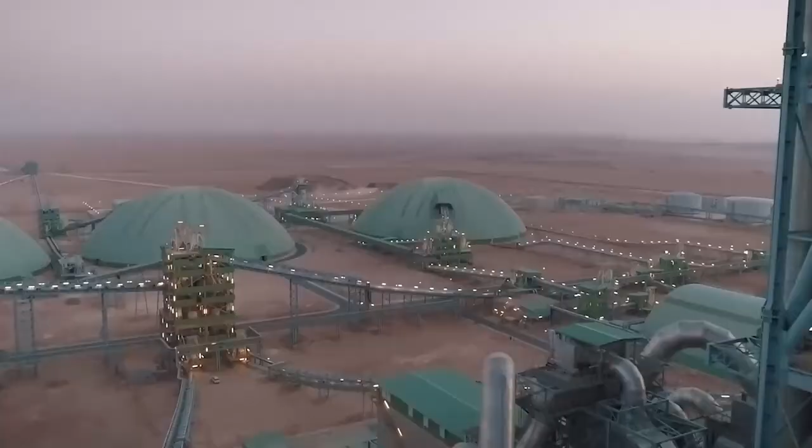And now on to the session today. It's our fourth session of the conference. And like I said, we'll be covering calcined clays. How are they made? Who is making them? And why are they a game changer for our industry? Well, we have all the experts here to answer all those questions.

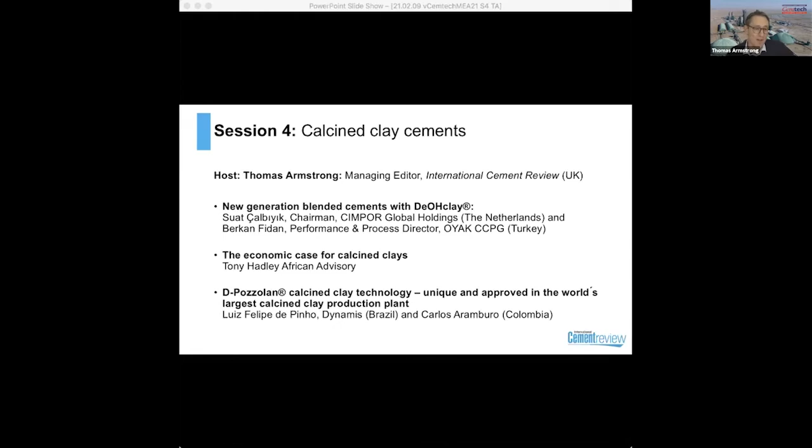I'm delighted to be able to introduce Luiz Felipe de Pinho from Dynamis with Carlos Aramburo. We'll be talking about calcined clay technologies. We have Tony Hadley from his African advisory consultancy, who will be talking about the commercial case, the economic case for using calcined clays. But first, our first speakers and a very practical case study will be given by CIMPOR Global Holdings and OYAK, and I'm particularly pleased to be able to introduce them now. If I could ask Berkan to start sharing his presentation slide deck, I'll make the introduction.

With us, we're delighted to welcome the chairman of CIMPOR Global Holdings since 2018, Mr. Suat Çalbıyık, serving many industrial enterprises in the fields of cement, steel, energy production and distribution, natural gas distribution, food, industry and construction, and having 36 years of sectoral experience, which includes the ownership of various engineering companies. Mr. Çalbıyık has been president of OYAK Cement Concrete Paper Group since 2016, and as I said, chairman of CIMPOR Global Holdings since 2018. Welcome, Mr. Çalbıyık. Thank you, Mr. Thomas.

Good afternoon, everybody. You say the 36 years experience. You explained my age. You don't look a day older than 36. Thank you. During the face-to-face meetings, I have the dinner for you. Thank you very much. Thank you for everybody.

I hope that this presentation gave the explanation about calcined clay. We named them the DeOHclay. CIMPOR Holding was established 3 years ago, but do you know that CIMPOR is in Portugal and Turkey? The owner of CIMPOR Holding is OYAK, the biggest pension fund in Turkey, and the other partner shareholder is TCC, Taiwan Cement Company, the 6th biggest producer in China.

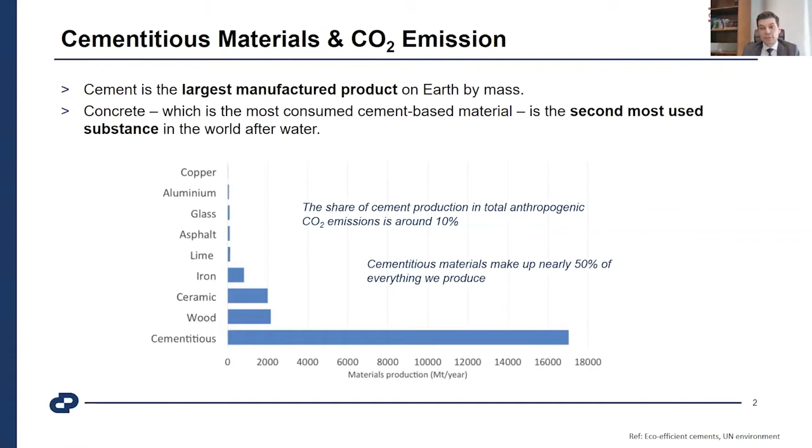There's a roadmap. There are many roadmaps available to decrease the CO2 emissions. It's one of the most important topics. It's not just a story of these days, but it becomes much more critical due to increasing temperatures of Earth.

But in the meantime, populations also increase, and global cement production is set to grow up to 23% according to the high variability case, and in the low variability case, it's around 15% by 2050. Direct CO2 emissions are also expected to increase by 4% globally.

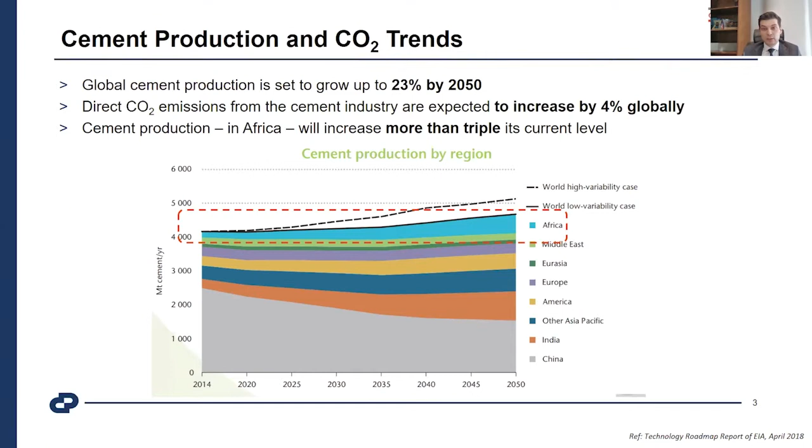And when you look at the expected trend to 2050, one of today's topics is Africa, because we just focused on that continent. And when we look at Africa, it's nearly triple today's value in 2050.

Also, as we discussed, one of the agencies, the International Energy Agency, shared that plan and program about its current situation. I used their data here, and according to the reference technology scenario, we need to reach the 2 degrees Celsius scenario. There's a difference, because our reference technologies are not enough to decrease the CO2 emissions to reach the 2 degrees Celsius target up to 2050.

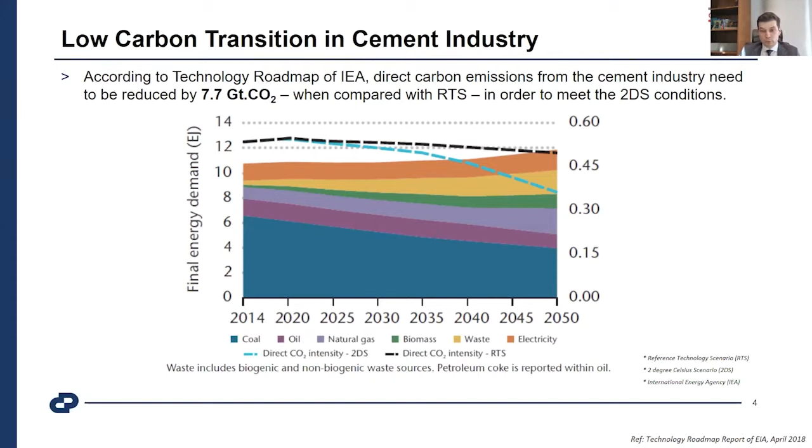When we look at it, 7.7 gigatons of carbon dioxide need to be reduced till 2050. But when we look at how we could do it as a cement industry on our side, there are four main topics, the most effective ones.

In the first stage, it has become popular and it's very critical: the carbon capture and oxy-fuels issue. The innovative technologies are also critical. It's a just-started journey, and many projects and research activities are going on, but there needs to be some time to expand the results and input them into the industry.

The second stage is the reduction of the clinker to cement ratio. It's also a known issue, known through blended cements and other issues. The cement industry tries to decrease the clinker content, but there are some drawbacks in the near future. And we focused on that issue mainly; besides that, for fuel switching, thermal energy efficiency and electrical energy efficiency, we are also doing investments and other things.

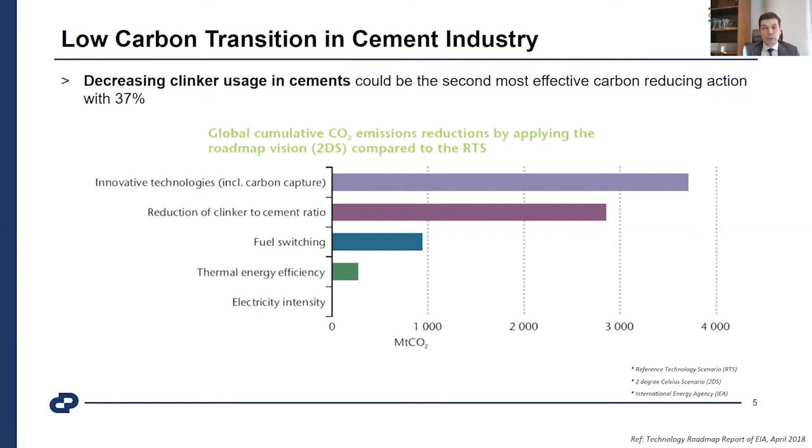But we believe that in the short term, the most critical action is to quickly decrease the clinker ratio to decrease the CO2 emissions. When we look at CO2 emissions, supplementary cementitious materials are critical to the decreasing clinker ratio action, because something needs to replace clinker.

When we look at the availability of those materials in the world, there are some tiny amounts of specific materials like rice husk ash, silica fume, and burnt shale available. There are also natural sources, but they're not spread all over the world. In Turkey, we are a little bit lucky about it, but all around the world, there's a very limited amount of natural pozzolans available, and they are limited reserves. They will be depleted and not available some day if we consume them like that.

On the other side, the most used ones are blast furnace slag, fly ash, and also steel slag. But in the meantime, the 2 degrees Celsius scenario is also based on some actions in the steel industry and energy production industries. That has started in Europe: plants start to close, recycling becomes much more active, and new green energy sources become attractive, so the amount of that material will become much less.

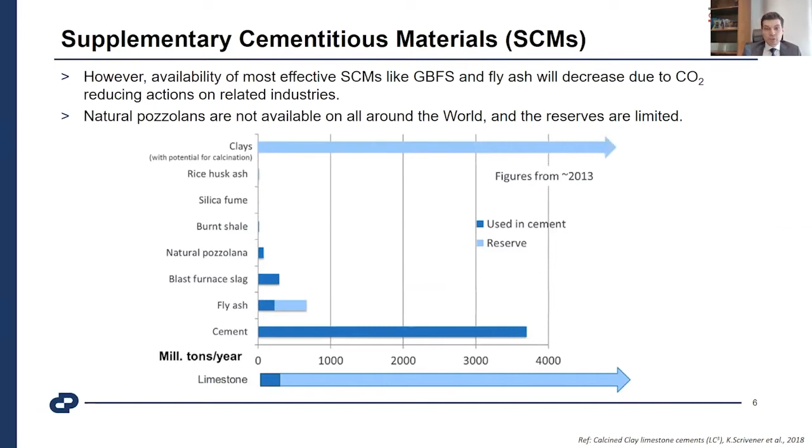At that point, the only one left is limestone as a filler component. Yes, there are many available reserves of limestone all over the world, but the problem is its reactivity; it's not a pozzolanic material. It helps some reactions on the early strengths and other things, but high quality, high strength cements cannot easily be made with a high amount of limestone added. At that point, the potential choice looks like clays, and we focused on that point.

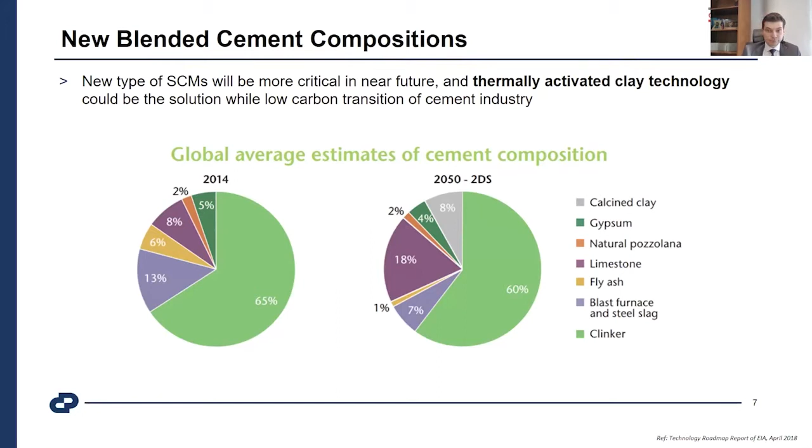What's the concept of thermally activated calcined clays? Clays are a very well-known and very abundant material all over the world, and there are some specific mineralogical compositions. The most known ones are 1-to-1 and 2-to-1 compositions, but when we look at the reactivity after thermal processing, the most reactive one is kaolinite, and after that, illite and montmorillonite are also reactive materials. But kaolinite differs from the other clay minerals due to its 1-to-1 composition.

That one-to-one composition is based on the oxygen silicon tetrahedral sheet with a single octahedral sheet, oxygen hydroxyl group with alumina. And the thermal process, as you can see in the bottom part for kaolinite, starts after 500, 550 degrees with delamination, and then dehydroxylation starts. After that comes the formation of metakaolin. Metakaolin is a known product made from high-purity kaolinite. Many industries are also using it.

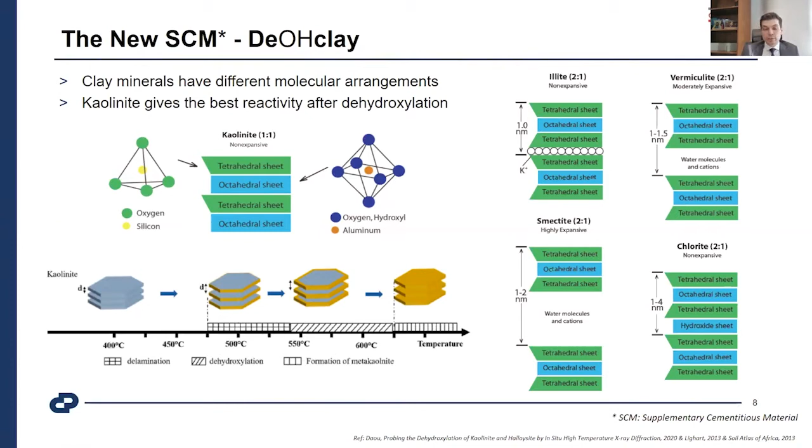In Africa, especially in West Africa, abundant resources are available over the bedrock, with a high thickness of material available for clays for calcined clay production. Besides kaolinite's one-to-one formation, the other issue is the thermal processing, the dehydroxylation range.

As you can see from the graph in the left part, kaolinite has the widest dehydroxylation temperature range, starting earlier after 550, and after 950 an exothermic reaction starts and crystallization happens, forming new crystals like mullite and cristobalite, which are not reactive. The aim is to keep the process within that margin, the red dotted part, to reach the highest dehydroxylation and keep the products non-crystallized. That way, highly reactive compositions can be achieved.

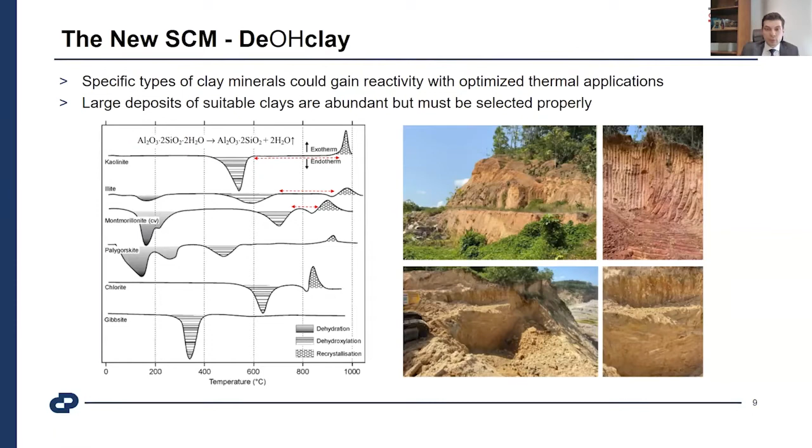Second, illite can be used, as you can see here. Montmorillonite can also be used, but its disadvantage is that the range between the endothermic and exothermic zones, the dehydroxylation part and the recrystallization part, is very narrow, and it's not easy to control. If a high amount of montmorillonite is present, there's a risk of recrystallization or non-dehydroxylated parts. Because of that, we focused first on kaolinite and then illite compositions in the reserve surveys.

There's a range according to composition and mineral formations, between 650, 700 degrees up to 900 degrees. As I explained, the process design and the recipe are tailor-made, related to the raw material.

Here is a photograph of our first product; in mid-August we produced the first industrial product. You see the calcined clay, its color, and its effect when added to the cement. By controlling the reducing atmosphere, it became much darker. We could achieve it.

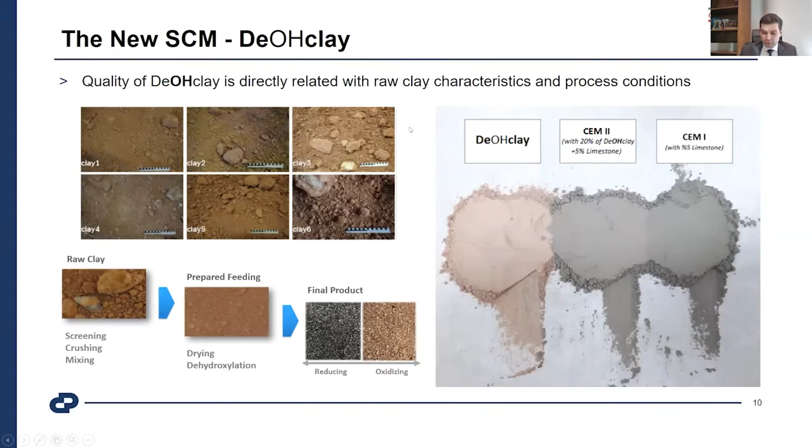When we look at the quality detail, as I explained, the most important part is differential thermogravimetry, and besides thermogravimetry, also scanning calorimetry. You can detect where dehydroxylation happens, where crystallization can start, and where the other impurities dehydroxylate. It's easy to define. Kaolinite has the advantage of being easily distinguished according to the amount of heat.

The heat for the endothermic heat formation happened, along with the mass loss. This allows us to detect the amount of kaolinite through that analysis. Based on this, we create a recipe for our studies, and according to quarry formations, we try to select the zone and samples, then do the survey and design the mining requirements.

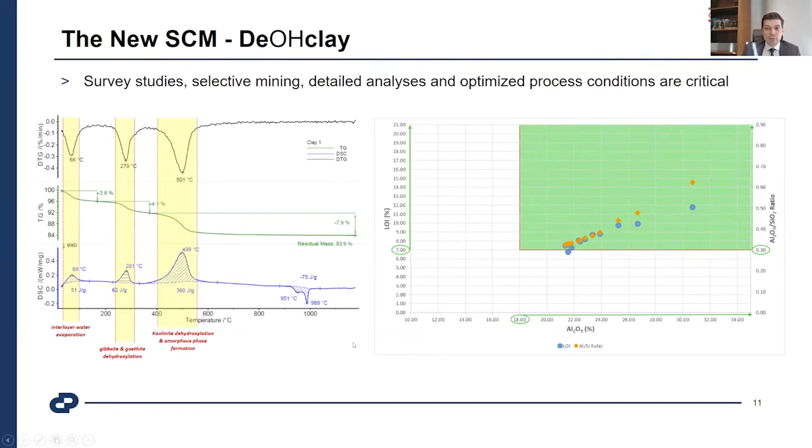The question now is, why did we start with West Africa? I want to explain that CO2 emissions must be decreased all over the world. Europe is much more active, and China is really doing many things about it too, but we are all using the same atmosphere, so it's critical to decrease CO2 emissions everywhere.

One reason is this. The other important reason is when we look at the geological formation of Africa, on the right side you can see the calcium carbonate contents. West Africa, especially the sub-Saharan region, has very low content of calcium carbonate. Generally the northern part holds the calcium carbonate reserves. Due to that, as you can see in the left part, the red zones, there are some clinker producers available, but mainly the clinker is imported.

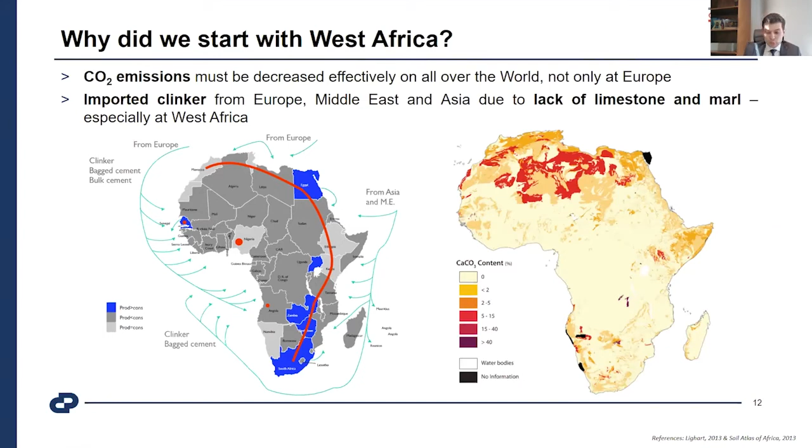Also, cement is getting imported to Africa. When we look at that opportunity, CO2 emissions come not only from production, but also from shipment and delivery. Huge amounts of clinker are coming in, which also has an indirect effect on the CO2 basis.

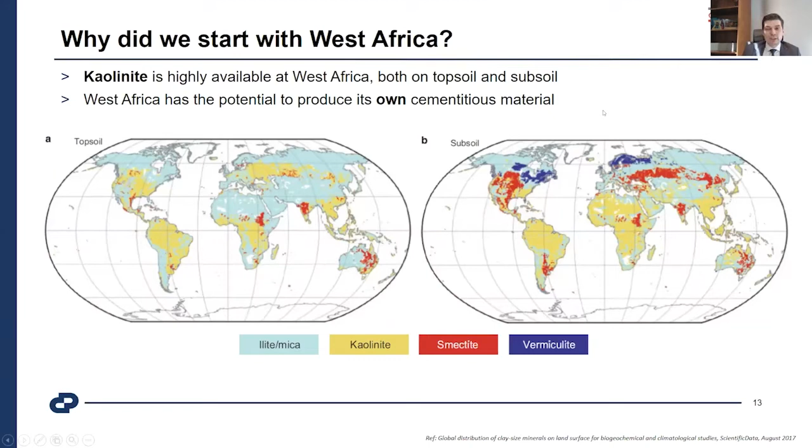The second point is when we look at kaolinite availability, especially kaolinite and clay formations, on the world map, the left part is topsoil and the right part is subsoil zones. The yellow represents kaolinite, while light blue also shows illite formations, which are generally favorable for making calcined clay, since thermal activation of clay gives you reactive materials. As you can see, in West Africa, both topsoil and subsoil are very proper for producing its own cementitious material rather than importing all the clinker and supplementary materials.

Specifically, when we look at the sub-Saharan region, there are nearly 30 soil types available in the soil literature. Of these, 5 are critical according to their alumina and iron contents and other compositions. These soils are generally favorable, including proper kaolinite contents.

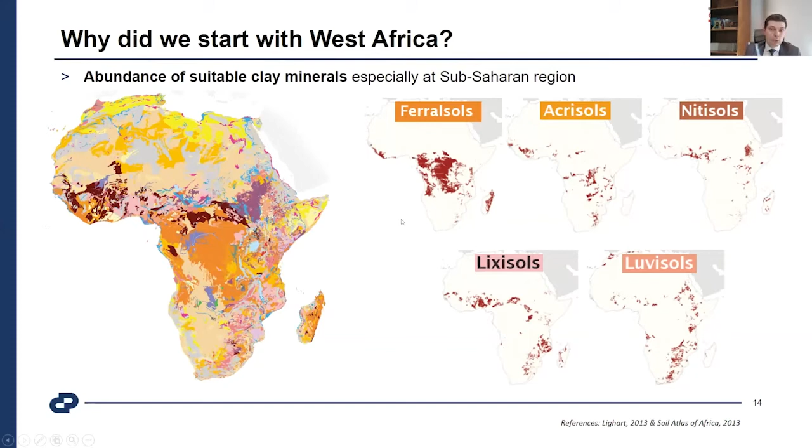On the right side you can see these soils and their availability, given specifically under their visual representation. You can see that West Africa really has great potential for these materials, and also for producing calcined clay.

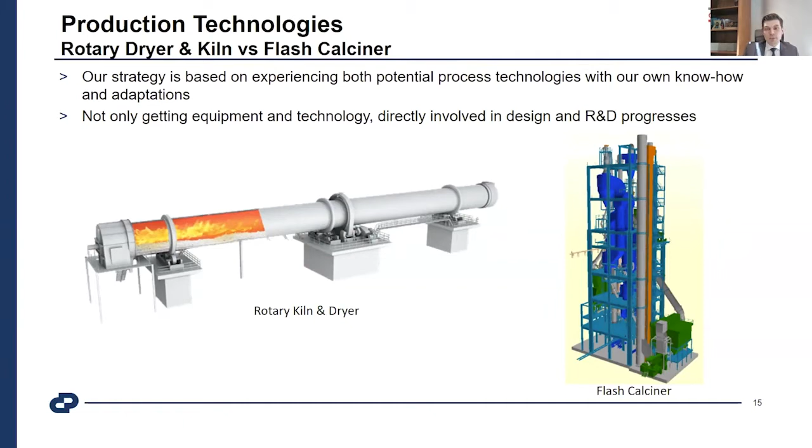Now I want to talk a little bit about production technologies, specifically rotary kiln and flash calciner technology. Everyone compares them and gives some idea about it. We preferred the rotary kiln and dryer option for our first plant in Abidjan, and the second plant, to be commissioned in Cameroon, will have a flash calciner design. Our aim is to experience both, because we believe there is no exact decision - it depends on conditions, material issues, and other details. We also want to experience both because we believe calcined clay will become much more important, and we need experience from both technologies.

On the rotary kiln and rotary dryer option, we now have more than 6 months of experience since first operation, so I want to give some rough details about that.

For the advantages: it's a simple, well-known process. The feed material doesn't need to be as fine as with the flash calciner option - it can accept a wide range of feed sizes, including some coarse portions. Moisture content is much more flexible compared to flash calciner, with no need to dry it, since it's a coupled design where the dryer is coupled with the pyro zone, the combustion, and the dehydroxylation zone. That's the advantage of flexibility on moisture content, and also the potential for increasing efficiency and capacity depending on moisture content - with less moisture, depending on the kiln design, you can get higher capacity and lower energy consumption. On the other side, there are drawbacks.

It's a little bit lower sensitivity on process control because you could not check inside of the kiln meter by meter, and you could not control it. You just get the output material, especially if the feeding material is not so homogeneous, both in moisture and mineralogical formation. It causes deviations on the final product.

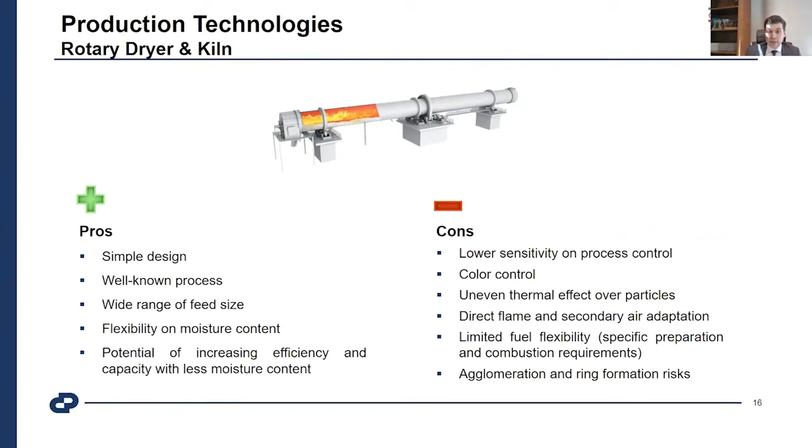On the other side, there's the flash calciner option. We will commission it at the end of this year, or the beginning of next year. According to our investigations and pilot scale applications with the technology partner, we observed some advantages and also some disadvantages. Basically it's flexibility on process control.

You could control each stage of that pilot process. You could increase oxygen content or create a reducing atmosphere. Heat transfer is much more effective compared to rotary kiln because of the fine ground material, so heat transfer efficiency is higher compared to rotary kiln.

There are various fuel options available, just secondary fuels and other things. Recirculating the gas can be used, and it creates flexibility on that part. Heat recuperation is also efficient, and it's easy to operate with reducing conditions because it can be managed.

The reducing atmosphere can be oxidized in the top stage or some other place, without any danger or risk in the process. Also, there are limited rotating parts and maintenance requirements compared with the rotary kiln and dryer option.

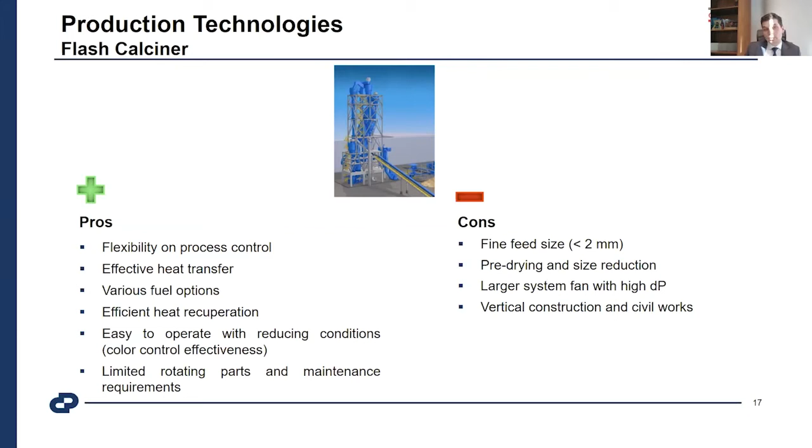It drops the material at the top, and it creates working air with high dP, which creates more electrical energy consumption on that specific issue. But there is also the other advantage, as I explained. The other thing is the vertical construction and civil works. There's a tower around 50-60 meters in height, according to capacity requirements. On the other side, for rotary kiln, there's no need to create a construction like that.

Now I want to introduce our first certificated DeOHclay blended cements in Africa. Two types of products we've served in the market, and these are CEM2AM QL 42.5 and CEM4BQ 32.5. These have the certificates, the first taken certificates in Africa.

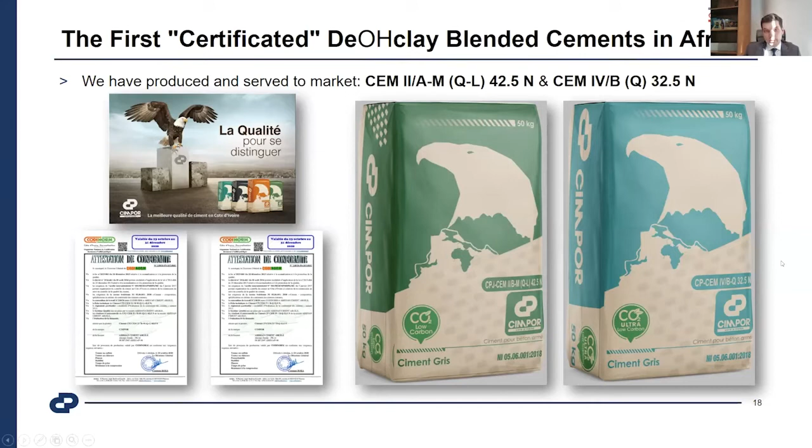When we look at the quality of these first results we've achieved, we compared it with CEM1 42.5, the existing product CEM2AL, and the other 42.5 product, the new product CEM2BM, which includes calcined clay. As you can see, the early strength is a little bit down, but in late strength it achieved more than CEM2AL and just a little bit higher than the CEM1 42.5.

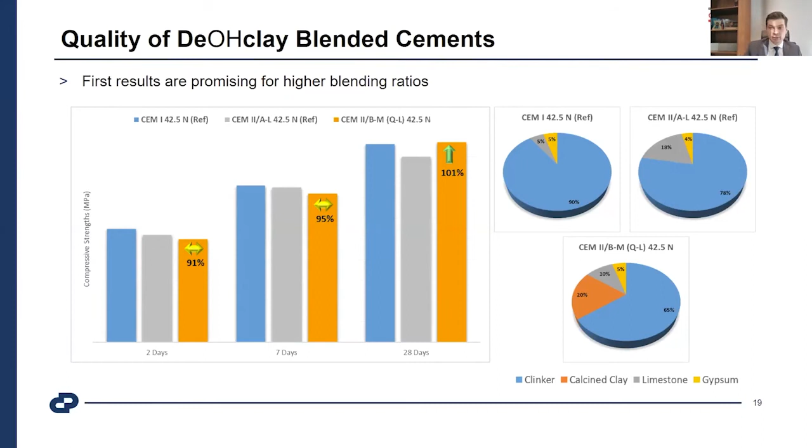It also gives us the opportunity to check and improve it, to increase the amount of calcined clay.

When we look at the CO2 reduction issue with DeOHclay compared with OPC, you can see from the graph, at the bottom left, the OPC clinker, standard OPC clinker. Blue columns show the heat consumption to produce that product, gray ones are the CO2 emissions while producing that product, and the orange trend shows the electricity consumption per ton of that product.

As you can see, producing OPC clinker compared with DOH clay, there's nearly 23% less heat consumption used to produce 1 ton of DOH clay. The other option on the right side is the low carbon option, which we are planning to produce at the end of this year.

It's based on some adaptations on the fuel combustion and also using secondary fuels and other options, especially using rather than fossil ones, some biological biomass compositions. There's also some difference in heat consumption, a tiny difference, but it's also 19% lower

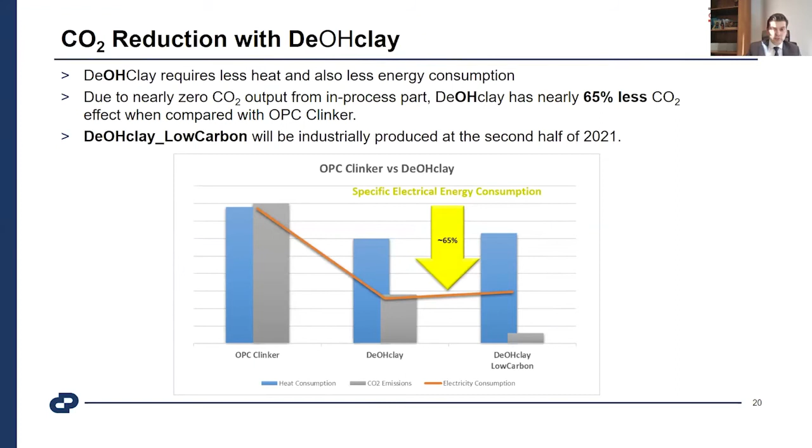that CO2 while producing DOH clays comes from the combustion part, not the in-process raw material part, because there is no calcination or decarbonation. It's just related to dehydroxylation, where hydroxyls and water vapor are removed, and it helps decrease emissions if the heat energy can be supplied from less CO2 emission sources, including materials and fuels. Then there's a chance of more than 90% decrease. And while producing cements, additionally, specific electricity consumption compared to OPC clinker is nearly 65% less, required while producing DOH clay.

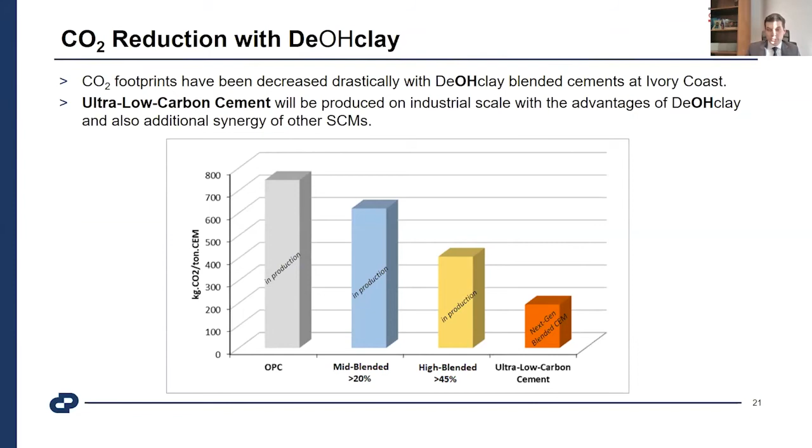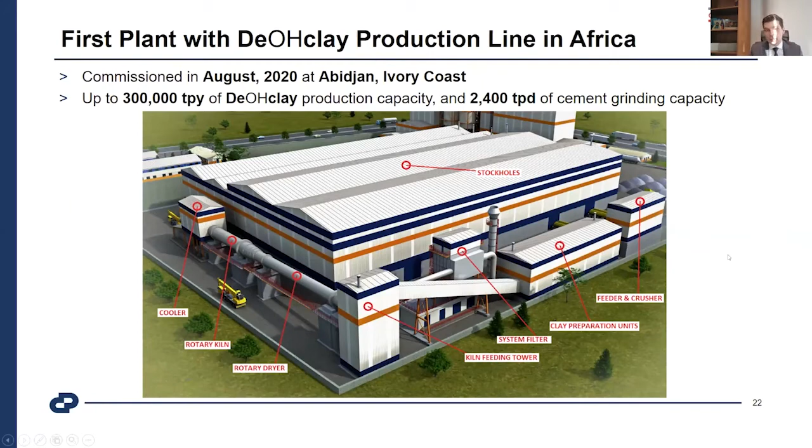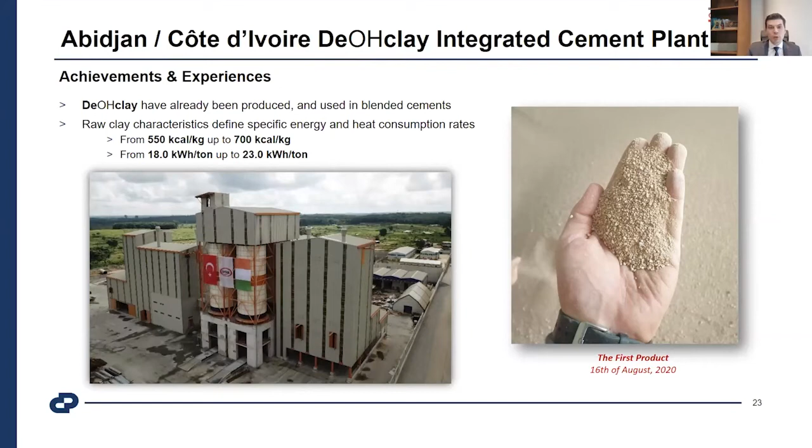What are our achievements? We saw that the grinding stage and blending adaptations are much more complicated than the thermal processing stage. Everyone talks about comparing just the calcination process and other things, but the product is unique for each plant and should be studied and investigated well to produce materials. I will explain in the next slides about this. And the cooling stage is also critical. The material is dusty and should be selected properly.

The cooling is also critical and directly affects color, heat consumption rates, and burning efficiency. As I said, there's not a typical design. It should be investigated well with the plant requirements from raw material to products. And I'll just show a variable cost difference to illustrate it. Heat energy is one of the most important factors. If you could solve it, if you could find some alternatives, you could drastically decrease your variable costs.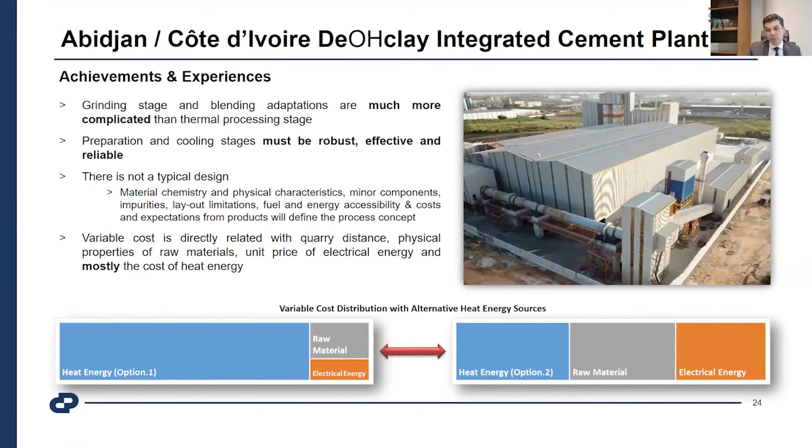Just some operational criteria. I want to say the quarry and survey is critical. As I said, we did studies with our partners on it. As you see in the photos here, we checked several reserves, several zones to find the correct reserves.

The mineralogy part is also critical. There should be balanced silicium and aluminum oxide contents and mineralogical compositions. It should be checked well. This is just a sample of our study, exact study on it. As you see, it's kaolinite and illite contents.

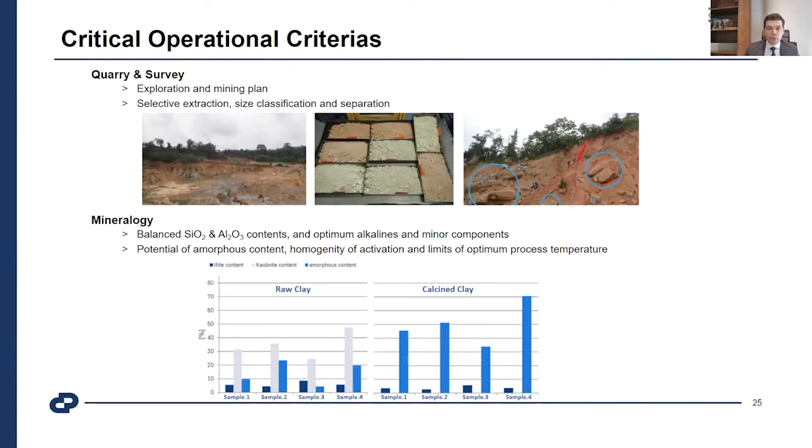You have to get as much amorphous content as possible to get the highest reactivity with the optimum process conditions. At a higher temperature, as you know, on one side it goes to crystals, non-reactive and hardly ground mullite, cristobalite, and other things. The other part is the non-dehydroxylated portion. It also causes quality problems on the cement side.

Clay preparation is also critical. There need to be simple, robust units. The pyro process needs to be well managed, and stable combustion and heat optimization are critical to decrease the variable cost and emissions and everything. It should be done.

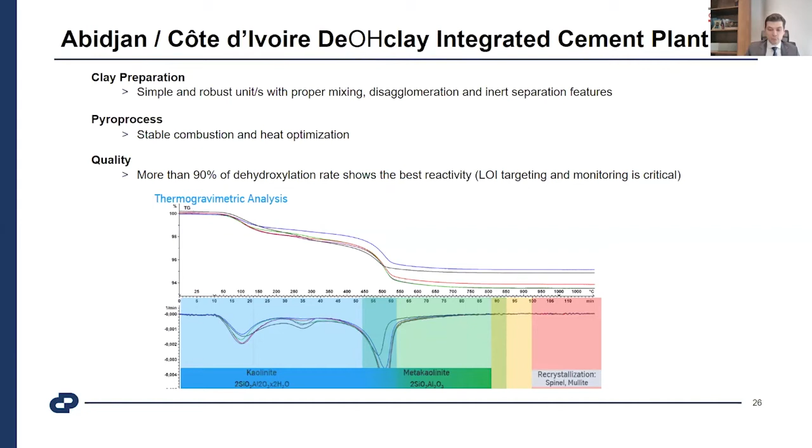Quality is important. LOI monitoring is also critical. As we all know, we manage kilns with free lime content and sampling, and there should be something decided on the quality of producing calcined clay. It must be color. It must be dehydroxylation rate control with specific equipment. We also managed and produced our own quality control formation and procedures. Color, as I said, is critical and related to the reducing atmosphere.

Dedusting and filtration are important because we are talking about very high moisture contents and a very high amount of water vapor. The filtration systems need to be selected according to that. Cooler design is critical because not only the cooling effect, but also recuperation and heat efficiency are directly affected by it. Additionally, oxidizing and reducing atmosphere are also related to the cooler. It's also critical.

And then, as I said, the grinding stage is critical because it's not a standard supplementary cementitious material like fly ash, steel slag or blast furnace slag. We are talking about raw clay, just removing its moisture, and it's related to the clay composition.

I want to show some figures here, exact figures we saw in plants from different countries in West Africa we investigated. I mixed and summarized some of them. As you can see, it's Blaine and residue. On the left side, you can see the D10, D50, and D90 micron figures. On the right side, you can see the Blaine fineness and the residue. It's known in the cement industry, but it's not related to it.

Some of the portions pulverize very easily and go over 9,000, 10,000 Blaine. But the other portions are left coarse, and it directly affects co-grinding or separate grinding selection. It should be investigated well. That part is critical because it directly affects the concrete rheology, water demand and other stages on the concrete side. We have also been working on it for the last 6 months.

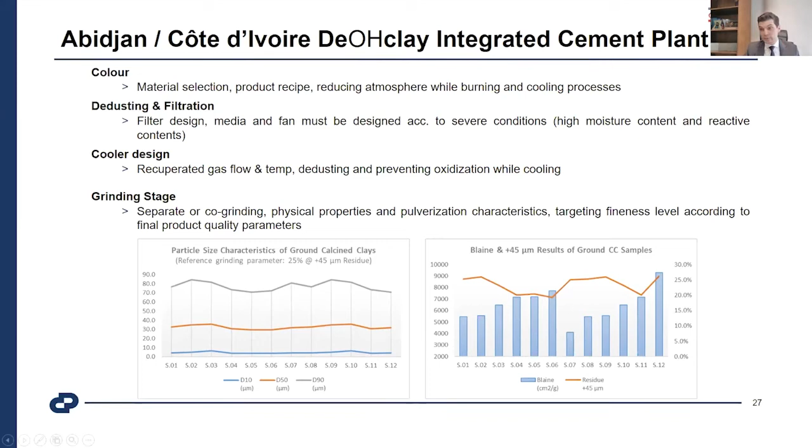And lastly, I want to introduce our first greenfield line with flash calciner. It will be the first plant in the world with flash calcining, and it will again be in Africa, in Kribi, Cameroon. The design capacity is 720 tons per day thermal clay activation and 2,400 tons per day cement production capacity. We checked it.